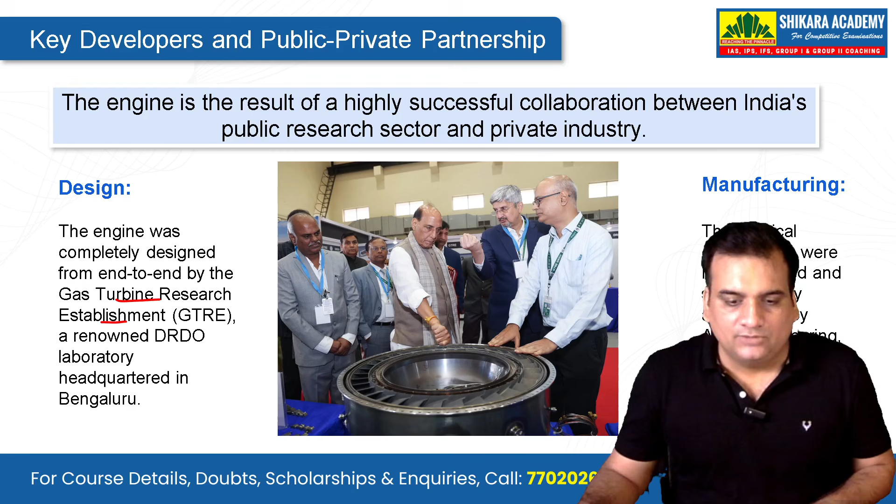The engine here is a highly successful collaboration between India's public research and the private industry. Why are we saying so? Because the design has been given by DRDO, specifically the Gas Turbine Research Establishment, a renowned DRDO laboratory, and the manufacturing has actually been done by Azad Engineering, a private defense company based in Hyderabad. So that is why we are saying that it's a result of public and private companies coming together.

This turbojet engine generates approximately 350 kgs of thrust, that is somewhere around 3.45 to 3.5 kilonewton. While this may seem like a very small amount — fighter jets have much higher thrust — it is designed or designated as an expendable engine.

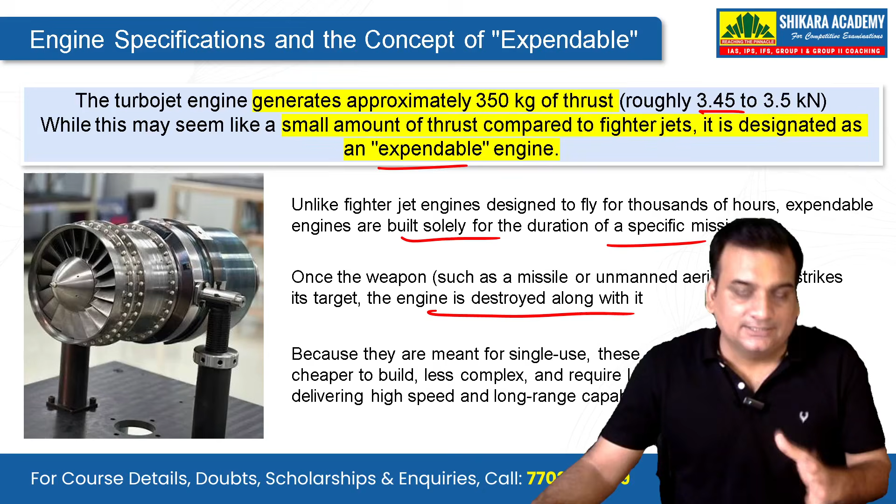Now what is this 'expendable' that we have been talking about related to this engine? Unlike fighter jet engines that are designed to fly for thousands of hours, expendable engines are built solely for the duration of a specific mission. That means once the weapon — a missile or an unmanned aerial vehicle — strikes the target, the engine is destroyed along with it. It's not going to be reused; it's just for a one-time strike. Because they are meant for single use, these engines are significantly cheaper to build, less complex, and require lower maintenance. That's what this 'expendable' term attached to it means — it strikes and destroys itself completely.

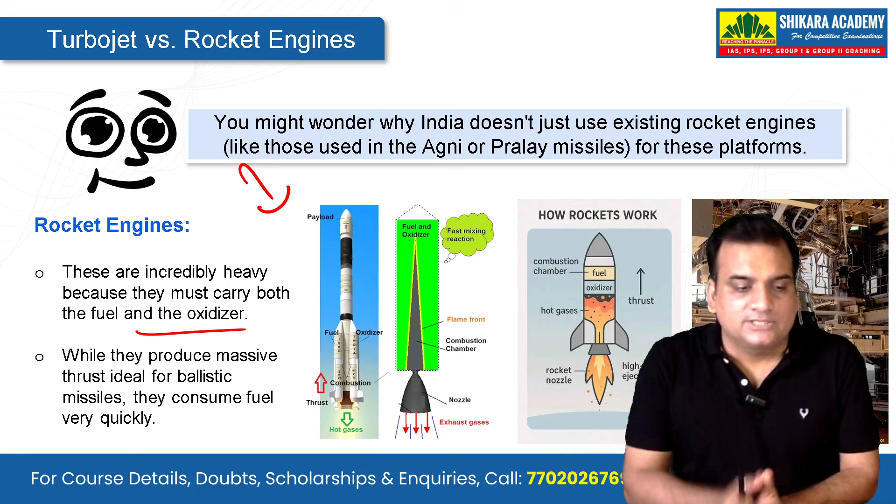Now you might be thinking, we already have existing rocket engines, like those used in Agni or Pralay missiles. So why these new engines? Rocket engines are incredibly heavy because they must carry both the fuel and the oxidizer, as in Agni or Pralay. While they produce massive thrust, ideal for ballistic missiles, they also consume fuel very quickly — so they are more expensive and take a lot more fuel than these turbojet engines.

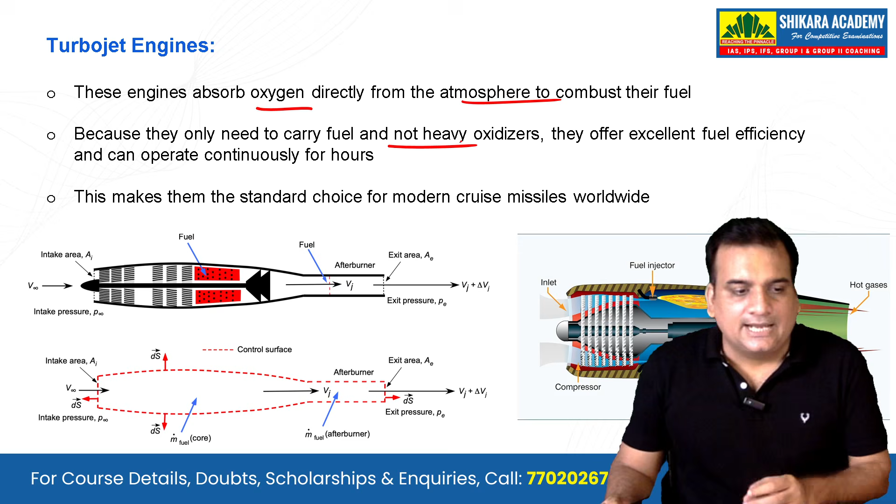These turbojet engines absorb oxygen directly from the atmosphere — you don't have to already carry it — and because they only need to carry fuel and not heavy oxidizer, they offer excellent fuel efficiency. This makes them the standard choice for modern cruise missiles worldwide, not only in India but even outside.

So what are the actual differences? The rocket engine's weight is quite high because it carries fuel plus oxidizer, while the turbojet engine's weight is low because it carries only fuel. In terms of efficiency, the rocket engine consumes fuel very quickly, but the turbojet engine has excellent fuel efficiency. In terms of endurance, the rocket engine gives short bursts of massive thrust, while the turbojet engine allows continuous operation for hours.

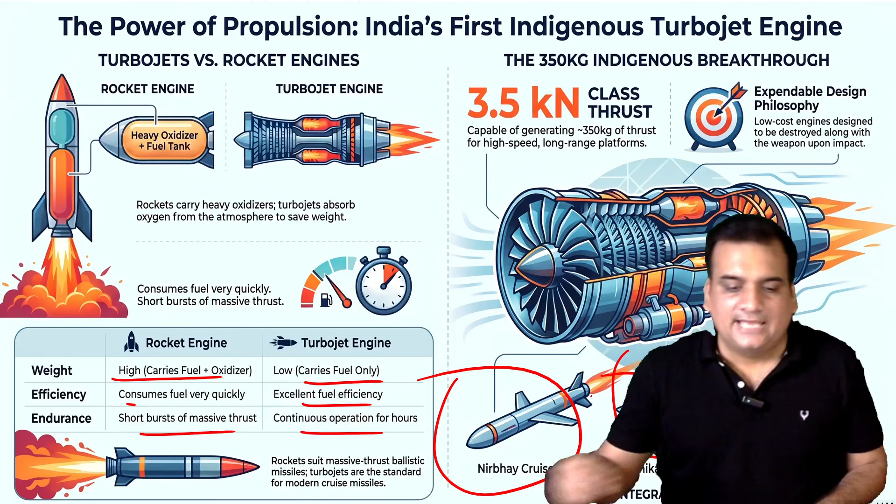We've already seen that the amount of thrust is somewhere around 3.5 kilonewton, and these turbojet engines are specially going to be used in the Nirbhay cruise missiles, kamikaze drones, as well as high speed UAVs.

Now, regarding future applications, the Ministry of Defense has not yet officially announced where it is going to be used, but what we can infer is that they are going to be used in long range cruise missiles, high speed jet powered UAVs, and kamikaze drones, and can also be deployed in aerial combat.

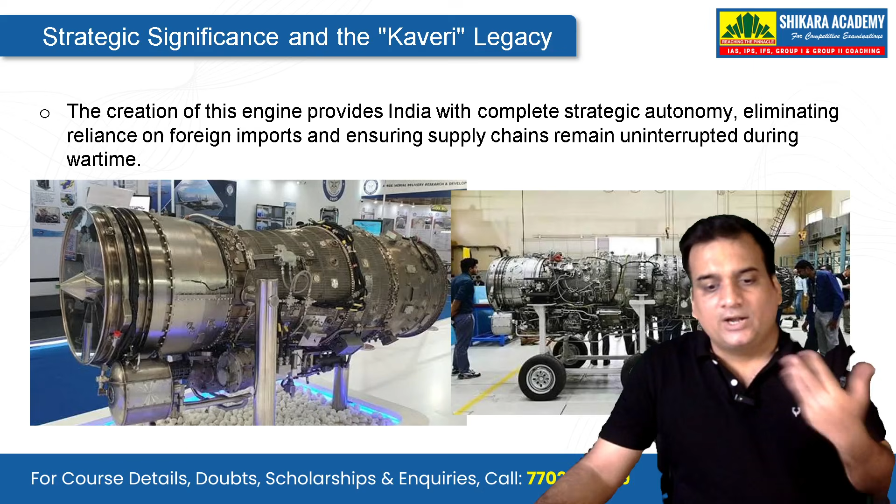Now, if you talk about the strategic significance — remember we talked about the Kaveri engine program, where India wanted to build, design, and manufacture its own engine. But due to a few reasons it got paused. However, because of that Kaveri program, we laid the foundation in manufacturing, design, advanced metallurgy, blade manufacturing, and thrust metrics that were directly applied to successfully design this 350 kg turbojet. All of it comes from the Kaveri program.

And by the way, for your info, Kaveri 2.0 is also in action right now. So mastering the small engines proved that the foundational technology is already ready, and now it has paved the way for India to develop larger, advanced engines in the future.

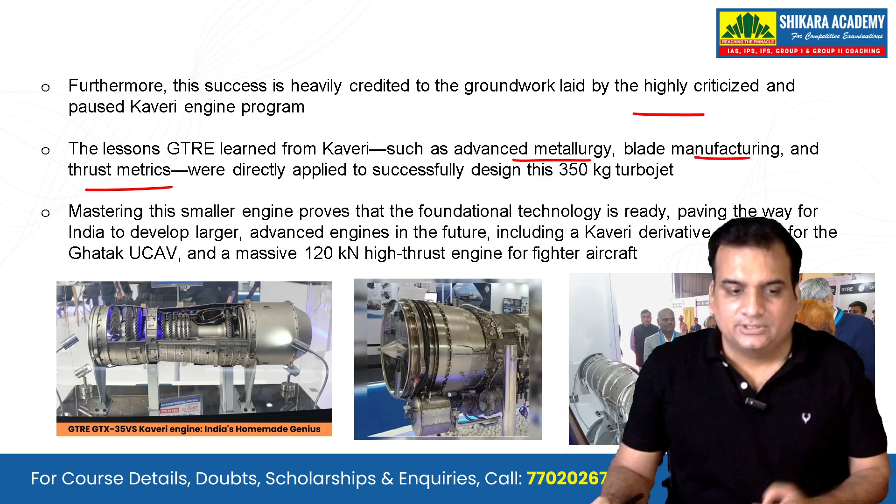So guys, that was DRDO's master stroke — a 100% designed and built in India turbojet, 350 kg, with the help of both public and private sectors in Hyderabad. What do you think about it? Tell us — do you really feel excited to know that India is indigenously creating, manufacturing, and designing these things which once we were forced to import?